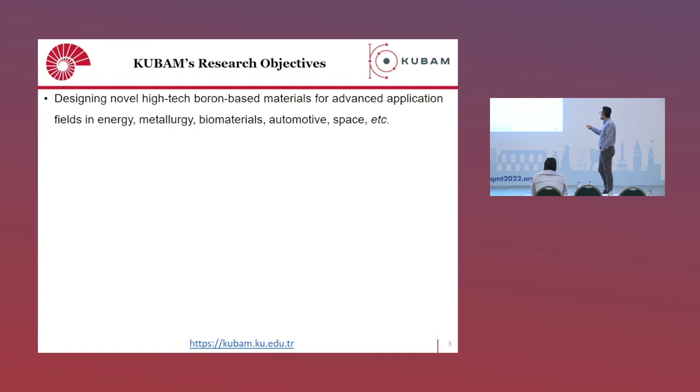Our main research objectives are designing novel high-tech boron-based materials for advanced applications in energy, metallurgy, biomaterials, automotive and space industry, conducting groundbreaking interdisciplinary research in state-of-the-art materials including thermoelectrics, superconductors, batteries, catalysts, hydrogen storage materials, laser crystals, and materials showing unusual properties like thermal contraction with heating.

We would like to patent materials with high potential for industrial applications, and we also initiate pilot scale production of these materials in collaboration with our industry partners. Last but not least, we establish a pioneer outreach program to develop interest in boron and advanced materials research for the whole Turkish community.

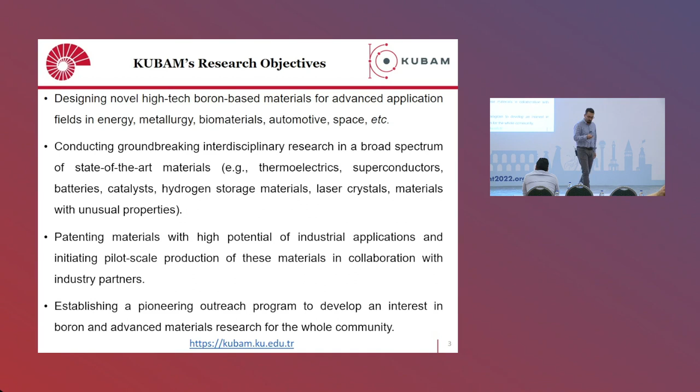Now why boron? Maybe you are interested in why we are doing research on boron-based materials. Let me tell you the motivation.

Boron in industry is mainly used to make glass fiber, ceramics, borosilicate glass, in agriculture for fertilizers, and in drugs and cosmetics.

In more advanced applications, this is magnesium diboride, a superconductor which is superconducting around 40 K, which is relatively high TC. It is used in energy - you can make magnets with this magnesium diboride.

Boron-10, an isotope of boron, is also a nuclear absorber which can be used in nuclear power plants. For military use, boron carbide, for example, is a very mechanically stable and lightweight material. That is why it is used in armor. It can also be used in airbags.

The world boron production capacity for 2018 is around 4.1 million tons, and Turkey itself provides almost 60% of this boron production. Now look at the revenue: in 2018, the total revenue was around $30 billion, which is quite big. But Turkey gets only 1 billion, which means we are producing 60% and getting only 3%.

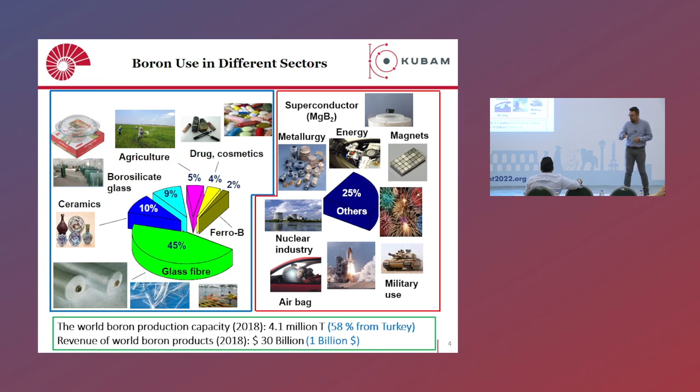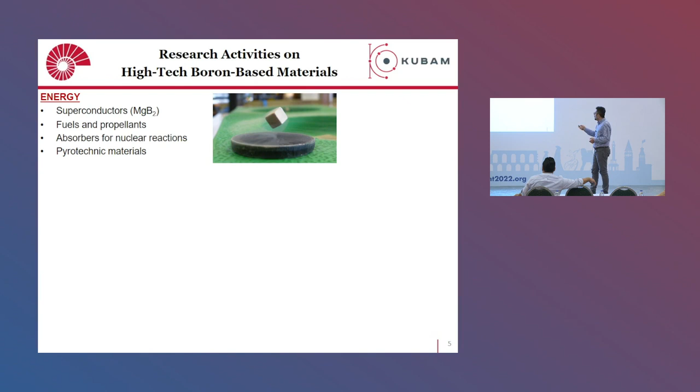Our main motivation is to convert boron from the mineral source to high-value materials. So we are doing energy-related research like superconductors, fuels and propellants, absorbers for nuclear reactions, or pyrotechnic materials. We also do research on next-generation 2D materials.

We try to make borophene, which is the boron version of graphene. So instead of carbon, we have boron, and it shows extremely interesting properties, even superseding graphene. We also make refractory materials and high-tech ceramics, etc.

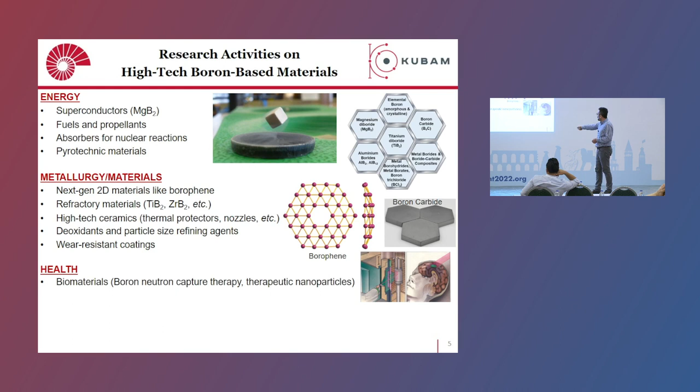We collaborate with other professors trying to produce biomaterials for cancer therapy - this is boron neutron capture therapy - or we try to produce therapeutic nanoparticles. We also prepare composite materials or materials which can be used as missile fuels.

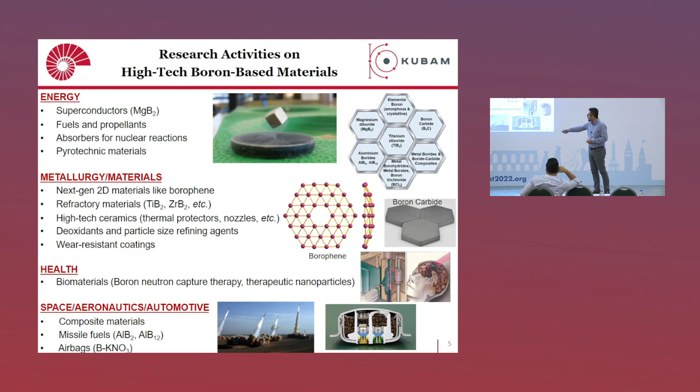Besides boron-based materials, we also work on other advanced materials for thermoelectrics. You can see this is the Curiosity rover, which is powered by radioisotope thermoelectric generators. We also do research on batteries and catalysts, for example.

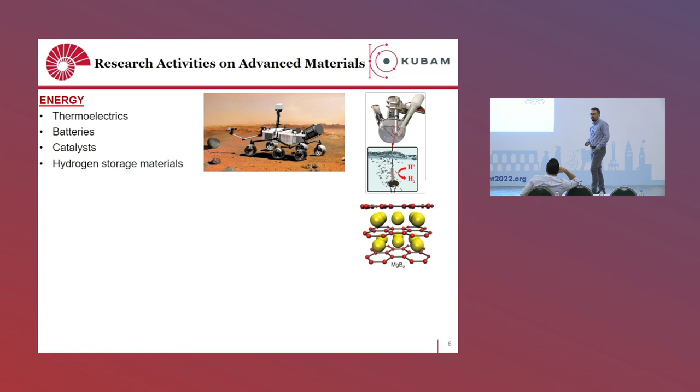This boron-based magnesium diboride is also a very good catalyst. In addition to its superconducting properties, it is also a very good catalyst which produces hydrogen as a clean energy source from water splitting.

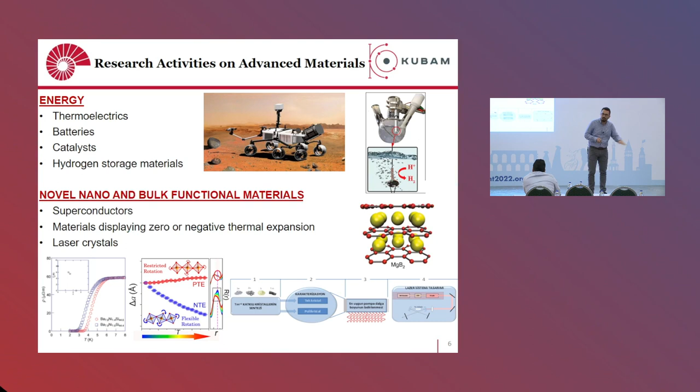We work on superconductors, not only magnesium diboride but even clathrates, for example, which show superconducting behavior. Some laser crystals we develop for niche applications, and we work on materials displaying zero or negative thermal expansion. Most metallic materials expand as you heat them, but these materials, because of their unique crystal structure, have either zero thermal expansion or contraction - negative thermal expansion. We do this in collaboration with other research partners.

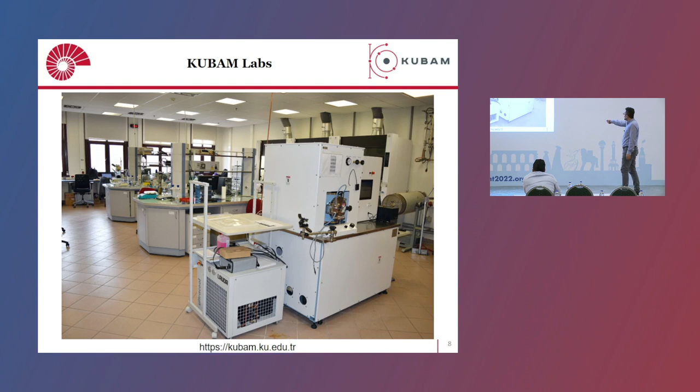To show you our infrastructure: this is one of our labs with a laser flash apparatus, ZEM3, resistivity measurement, thermal conductivity measurements, our XRD, thermal analysis with DSC and TG. We have a glove box for air-sensitive materials, our own SPS to sinter powder materials, and high temperature furnaces that can heat up above 1500 C.

Some other furnaces grow single crystals, for example, by vapor transport method. We do some battery research in this glove box as well. Here you can see a cold isostatic press that we use to sinter materials at low temperature, at room temperature, if we try to avoid high temperature annealing.

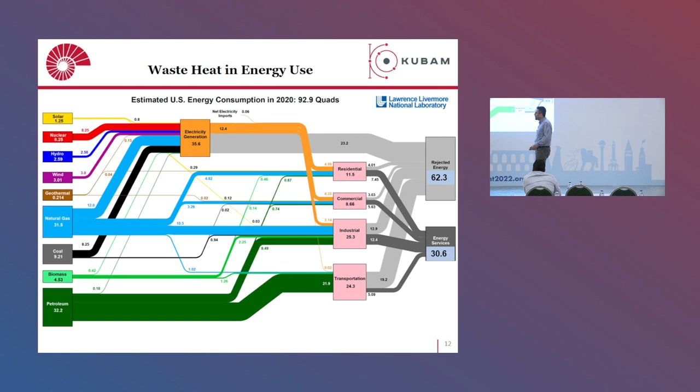Thermoelectrics, today there were a couple of talks given by experts describing the thermoelectric effect, but let me revisit here. Out of 100% energy, still mostly from non-renewable sources like petroleum, coal, natural gas, only 1/3 is provided for useful energy services, while 2/3 is rejected as mainly waste heat. So our main motivation is to convert this waste heat into electricity to contribute to global energy sustainability.

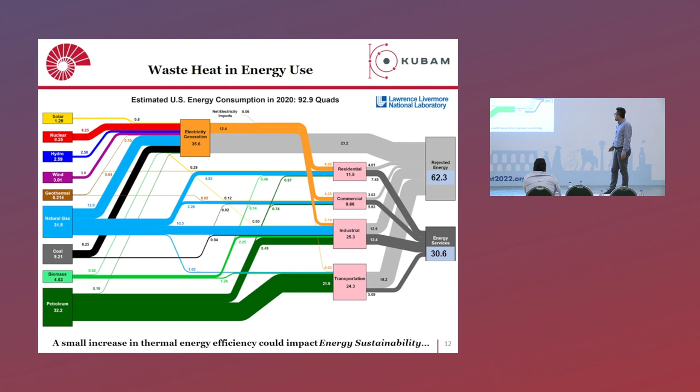These materials are solid-state materials, which means everything is happening through the atomic scale. They don't have any moving parts, don't need maintenance, have long and scalable life, and can be scaled from micro scale applications to large-scale applications.

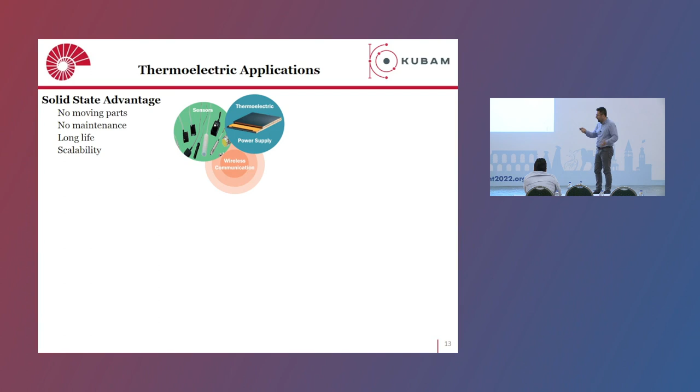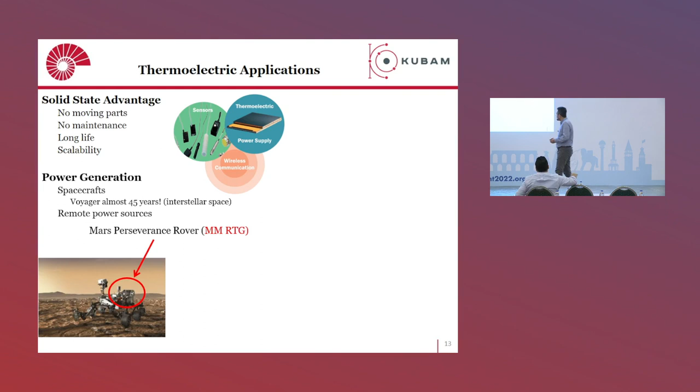For a very long time, they have been used for powering spacecrafts, for example Voyager, which has been investigating interstellar space for almost 45 years, powered by these multi-mission thermoelectric generators. Current ones, like the Mars Curiosity rover and even Perseverance sent a couple of years ago to Mars, are still producing energy through this multi-mission thermoelectric generator. They use the heat produced by radioisotope decay of plutonium oxide and convert this heat into electricity.

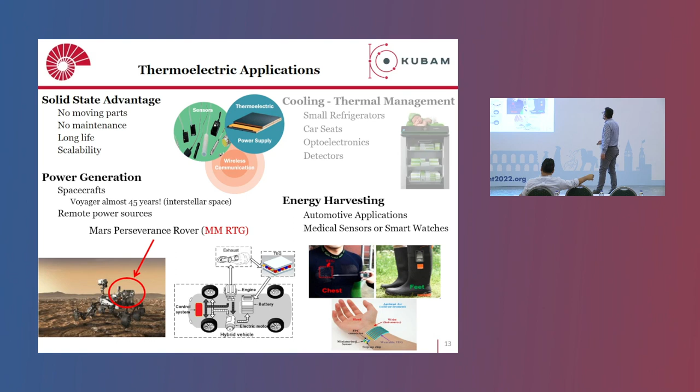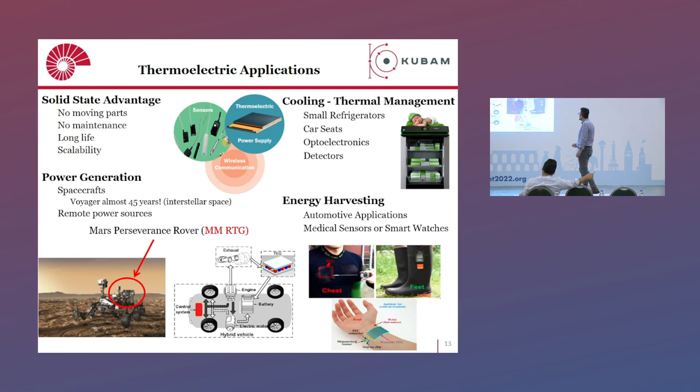You can also convert waste heat in automotives or automobiles to power lighting in the car, or use it for energy harvesting, for example as a medical sensor or smart watches. Besides these power applications, they can be used for cooling and thermal management, creating small refrigerators which need more precise, noise-free cooling. You can use it for cooling car seats. Optoelectronics or detectors need more precise local cooling, so thermoelectrics can provide solutions for that.

So here is the thermoelectric theory. These are based on the Seebeck effect, for power generation, and the Peltier effect, for cooling. Here we have N and P type semiconductors. If we create such a circuit and apply a thermal gradient, this produces voltage because we force charge carriers to move from the hot side to the cold side, similar to gas molecules, and this creates a potential difference.

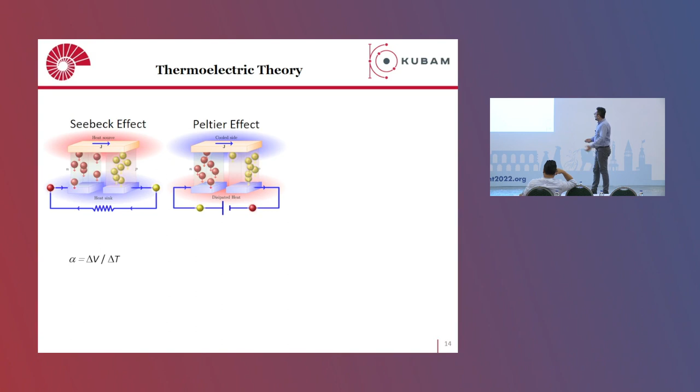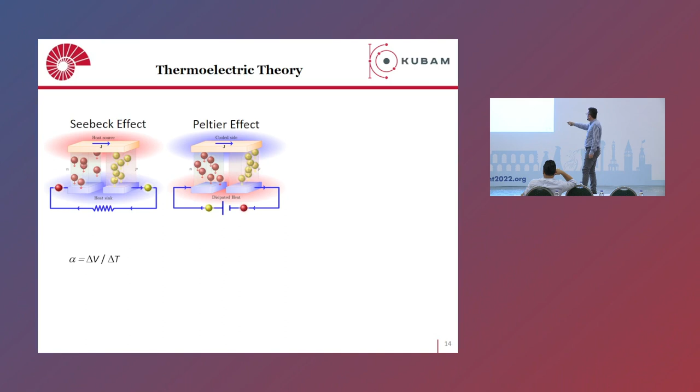This potential difference created per temperature gradient is called the Seebeck coefficient. For the same circuit, instead of applying a temperature gradient, if you apply current, you create a temperature gradient, which means you can use it as a Peltier cooler. So this part will be cooled, this part will be heated, and you can dissipate this heat with some methods.

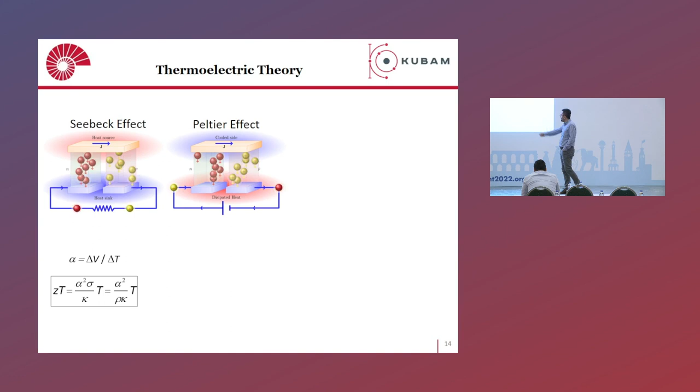In the materials part, we have this ZT, called the dimensionless thermoelectric figure of merit, related to the Seebeck coefficient squared times the electrical conductivity divided by the thermal conductivity times the temperature. So for high thermoelectric efficiency, we try to get good electronic properties, but at the same time lower the thermal conductivity, which is quite demanding and hard.

So if we go to the efficiency, device efficiency is related to the Carnot efficiency times a function of this material's ZT. You can see that rather than having high ZT at one particular temperature, we target high ZT over a large temperature window so that we have high average ZT.

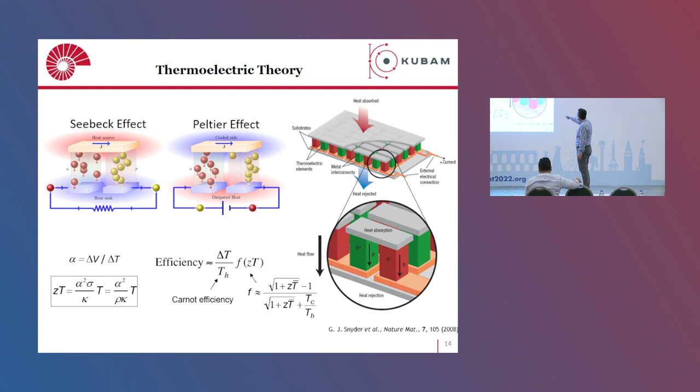Okay, so these are the thermoelectric couples. You can see we have some metal substrate here, some ceramic parts. You create the modules when you put these thermoelectric couples electrically in series and thermally in parallel, tens of them.

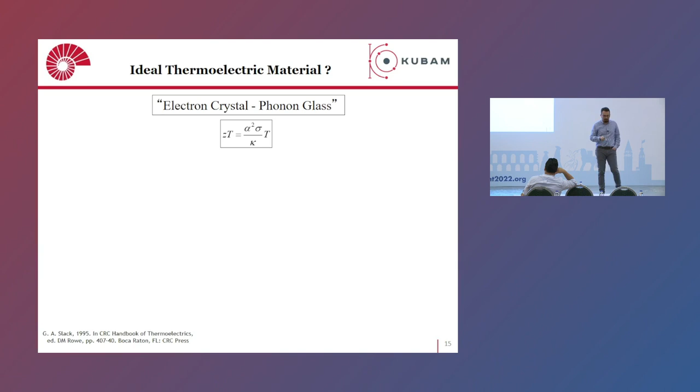So what are the ideal thermoelectric materials? Phonon glass electron crystal describes these materials, meaning they should be very good electronic conductors like perfect crystals, but at the same time have low lattice thermal conductivity like glasses. This is hard to make in one particular material because of these conflicting transport coefficients.

If you have large carrier concentrations, this is provided in metals. Metals have large carrier concentration, but when metals have large carrier concentration, they have low Seebeck coefficient. On the other hand, for semiconductors, you can see that they generally have low carrier concentration and large effective mass.

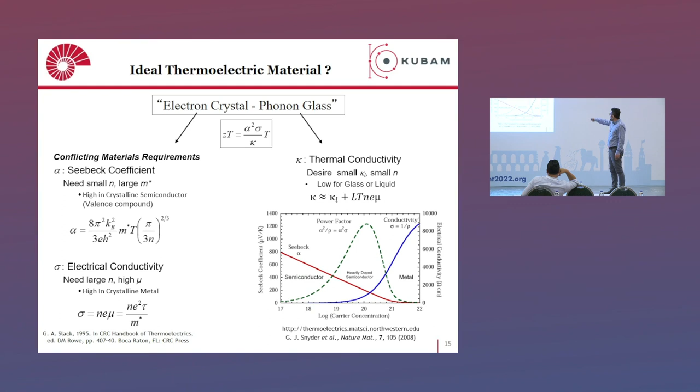For the thermal conductivity part, you can see that this is composed of two contributions: one is the lattice thermal conductivity, another is the electronic thermal conductivity. This is the Wiedemann-Franz law. The electronic portion depends on the electronic structure of the material. The only thing independent of the electronic structure is the lattice thermal conductivity.

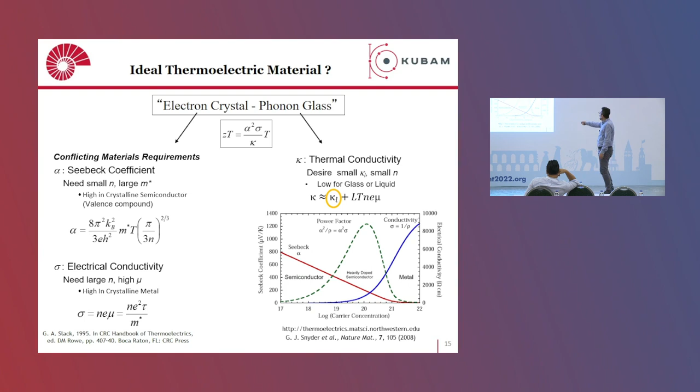So it means we have to find materials that display good electronic properties and low thermal conductivity, and you can tune these properties either by charge carrier optimization or by lowering the lattice thermal conductivity. Let me describe how we can do that.

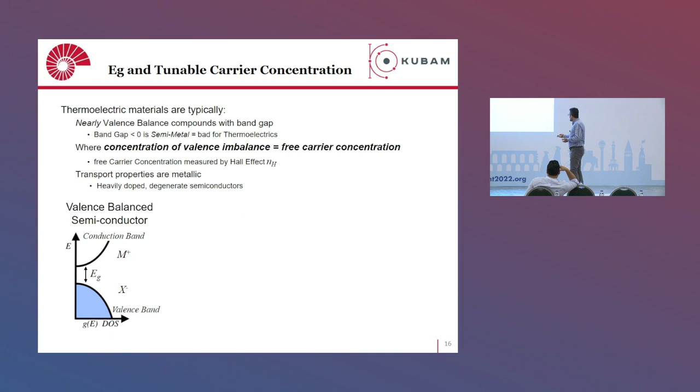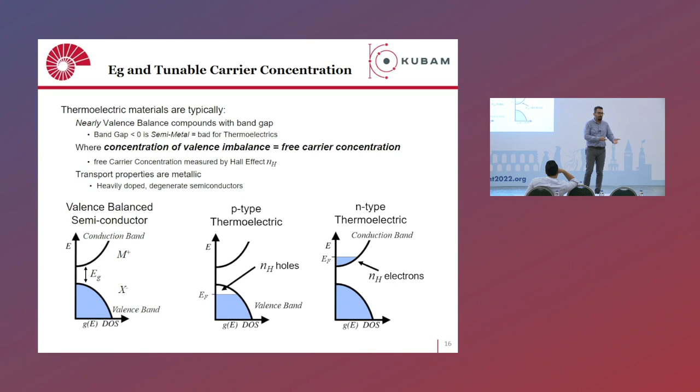The first thing we have to establish for good electronic transport is the band gap. Materials should have a band gap, because if you don't, you have both types of carriers at once. This band gap should be small enough so you can dope the material either p-type, with the Fermi level in the valence band, or n-type, with the Fermi level in the conduction band. But it should also be large enough so that you don't have separate n and p-type carriers, electrons and holes, at the same time, which kills the Seebeck coefficient.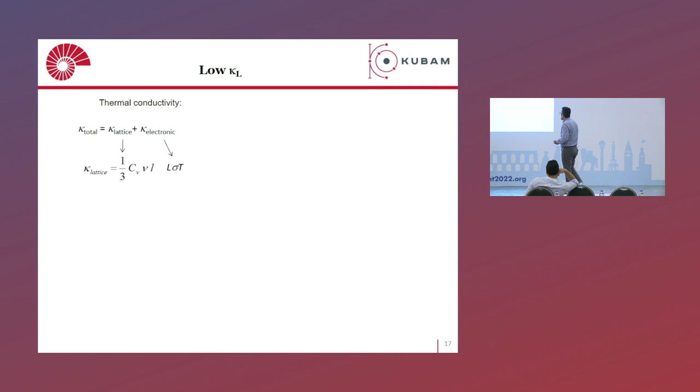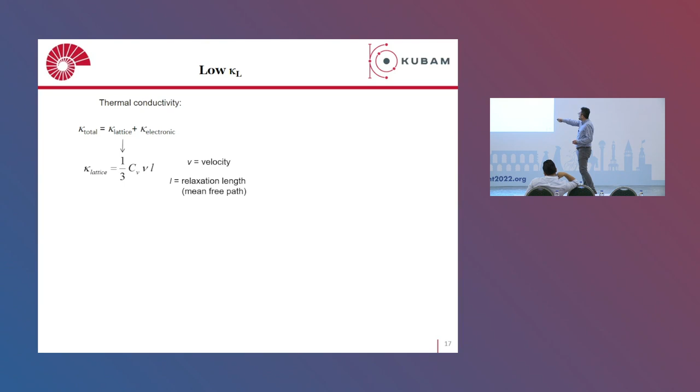Now what about the thermal conductivity? The electronic part is connected to the electronic structure through the Wiedemann-Franz law. The lattice thermal conductivity depends on the specific heat, the phonon velocity, and the phonon mean free path. You can lower this relaxation length, or phonon mean free path, by introducing different scattering sources into the microstructure: nanoparticles, a large density of grain boundaries, and point defects.

You can also introduce nanograins. So say this is your grain structure with large grain sizes. If you grind this material, you create smaller grain sizes, which introduces a higher density of grain boundaries. This increases the grain boundary density, scattering more of the heat-carrying phonons and lowering the thermal conductivity.

You can also create nanocomposites, which means you can intentionally introduce secondary phases either within the grains or at the grain boundaries, and these also act as phonon scattering centers.

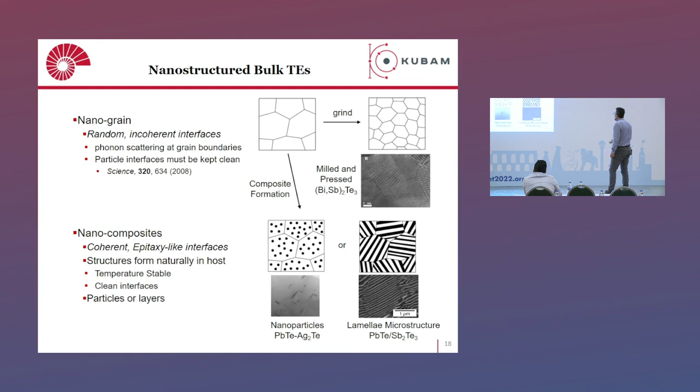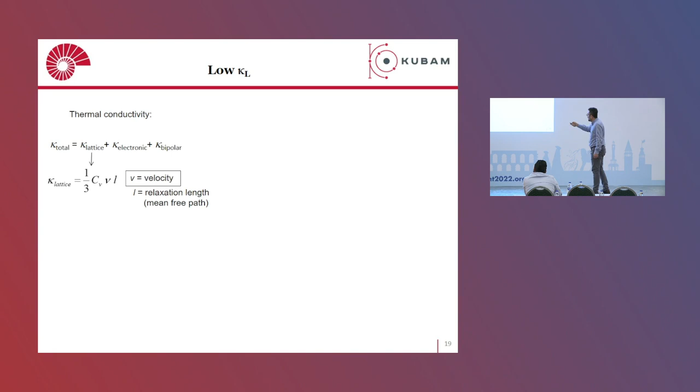For the lattice part, we can also tune the velocity, because lattice thermal conductivity depends on the phonon velocity as well. Here's a simple scheme showing that if you have a small unit cell composed of exactly the same atoms, you have only one phonon mode, the longitudinal phonon mode, and the slope of this dispersion curve gives you the phonon velocity.

Now, if you introduce a secondary atom, increasing the size of the crystal structure, this one mode splits into two. If you introduce more atoms, increasing the lattice, you shrink the Brillouin zone, and you create a lot of optical high-frequency phonons as opposed to low-energy acoustic phonons. These optical phonons are flat, meaning their phonon velocity is almost zero because the slope is zero.

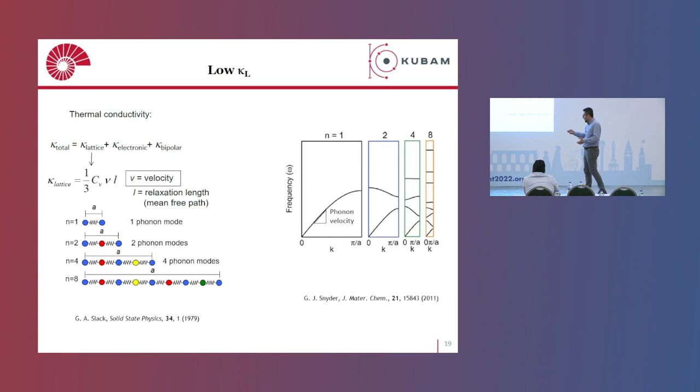If you increase the size and number of atoms, different types of atoms, you basically have larger unit cells, which leads to more low-velocity optical modes that substantially lower your thermal conductivity.

This is nicely shown experimentally for a particular family of materials called the Zintl phase. You can see lithium zinc antimonide, strontium zinc antimonide, all the way to ytterbium manganese antimonide. These materials have similar atoms, but the difference is the complexity.

You can see this is only 6 atoms per unit cell, and as you increase the unit cell size, you introduce different local environments. Here you can reach 208 atoms per unit cell. A large unit cell with a very different local environment leads to lower thermal conductivity, as experimentally shown. This is lithium zinc antimonide, and this is ytterbium manganese antimonide, with extremely low lattice thermal conductivity. You don't need to do anything else - this family of materials has a complex unit cell which inherently shows low thermal conductivity.

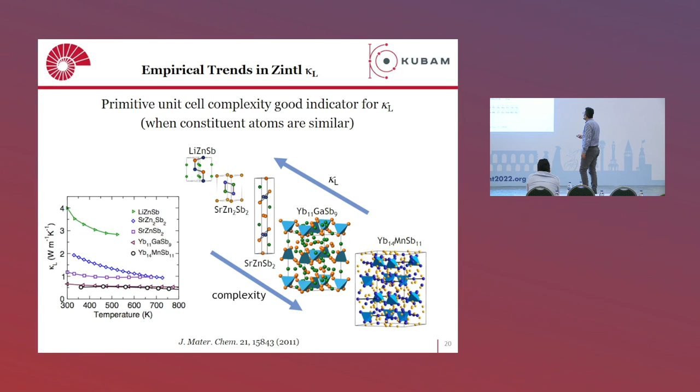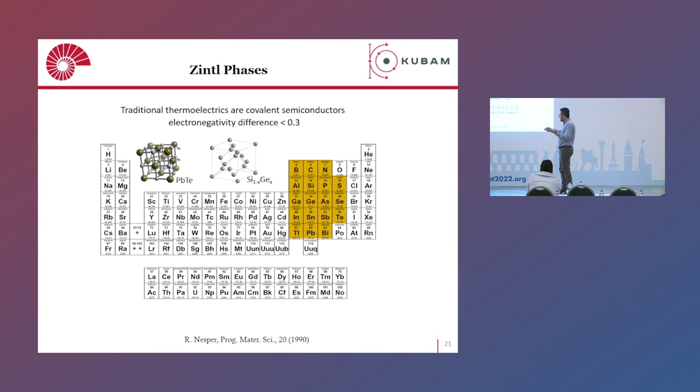Now let me tell you what a Zintl phase is. Maybe this is the first time you're hearing about it. Most traditional thermoelectric materials like lead telluride and silicon germanide, used for space applications, are covalently bonded materials composed of p-block elements.

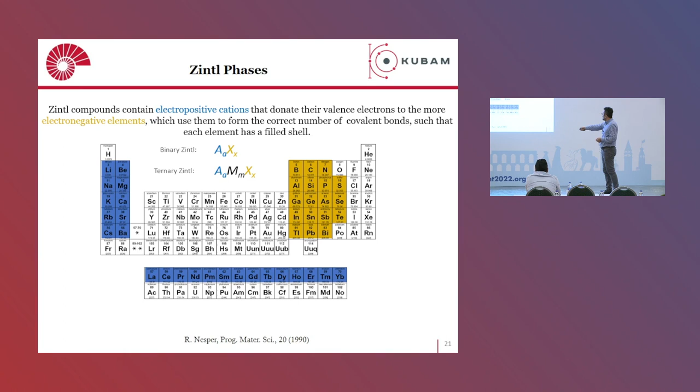Zintl compounds contain both electropositive cations, which donate their valence electrons to the more electronegative p-block elements. These anions use the electrons to form the correct number of covalent bonds so each element has a filled shell - essentially an electronic transfer from cation to anion, which leads to a particular connectivity of the atoms. The cation can be alkali metals, alkaline earth metals, rare earths, even transition metals, and generally the anionic part is the p-block element.

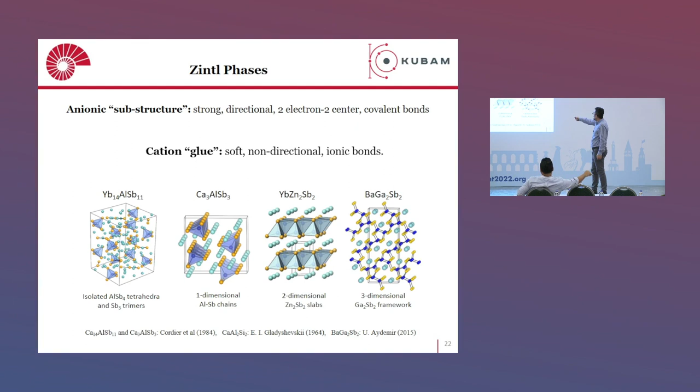These Zintl phases are unique because they have an anionic substructure. You can see different anionic substructures - 0-dimensional, 1-dimensional, 2-dimensional layered, or even 3-dimensional structures. They have strong directional two-electron, two-center covalent bonds, which accommodate the cations in the cavities, shown here as blue atoms. These cations have soft, non-directional ionic bonds with the covalent framework, so they're like composite materials at the atomic scale.

Most of these materials inherently show p-type properties - the 122, 526, 313, 14111, 122 phases all inherently show p-type behavior because of cation vacancies. Generally when you make them, you observe a very stable cationic defect in the structure - calcium, magnesium, or whatever - and they show inherently p-type behavior.

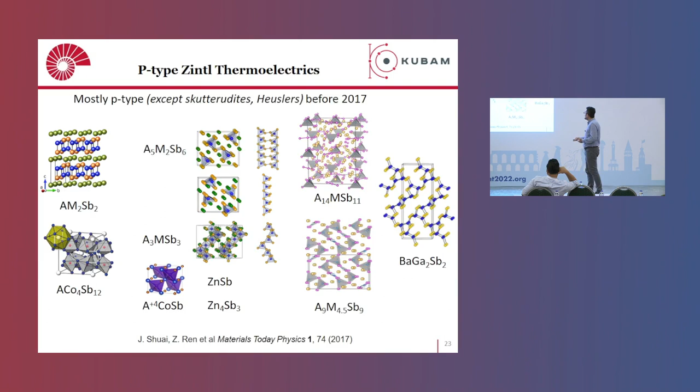But only recently, a paper came out from the Panasonic group showing that magnesium-3-antimony-2, a typical Zintl phase with magnesium deficiency that has so far shown p-type behavior, can actually be made n-type - and the n-type analog can show even better thermoelectric efficiency. They showed that while state-of-the-art materials generally reach a ZT of 1, this easily reaches 1.5 at relatively high temperatures.

To make this n-type, there's a unique strategy: you have to add excess magnesium when making the material, to suppress the formation of magnesium defects which lead to the p-type character. So we knew you could make this material n-type, but then we thought - how can we improve the thermoelectric efficiency further, or what else can we do?

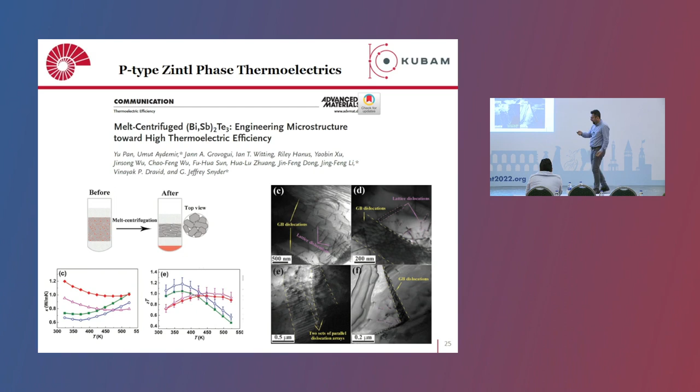This lowered the thermal conductivity substantially. Compared to the non-centrifuged material, you can see the thermal conductivity is lowered by 50%, and the ZT is also improved a lot.

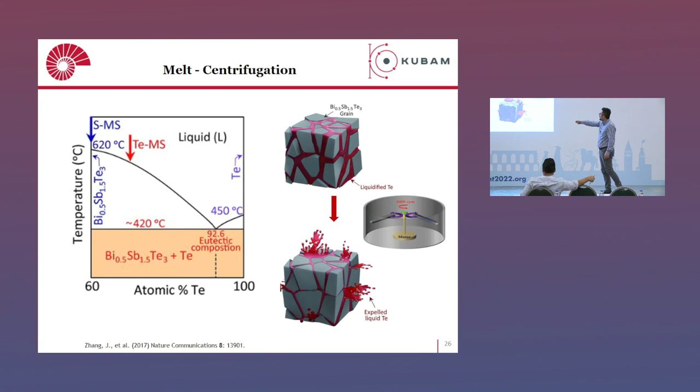Okay, the idea was this: you have bismuth antimony telluride. If you add tellurium, you have this eutectic point. If you just heat this material around 500 degrees, you can remove this melt and create such microstructural features. So we thought, why not apply this to magnesium antimonide?

Why? Because the nature is similar. Here you can see magnesium 3 antimony 2, and here we have magnesium. Between magnesium and magnesium 3 antimony 2, we see also a eutectic temperature. So we went a little higher than 650, maybe 750, by adding excess magnesium and applied this technique.

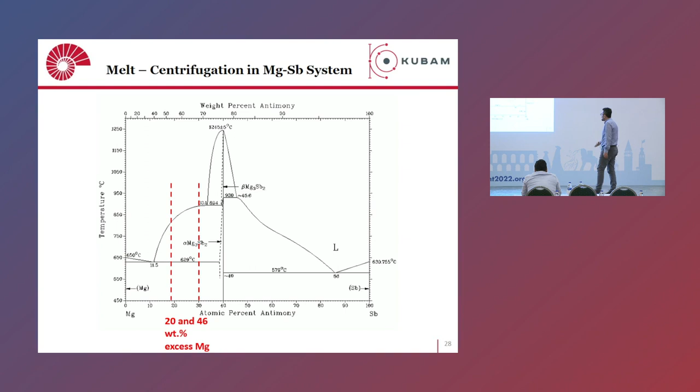So we added 20 and 46 weight percent excess magnesium, and then did some research to see the effect of it. This is done with in situ and external addition.

Let me explain it to you here. You can put all these materials in a steel vial and do high energy ball milling, let's say 2 hours. If you add the magnesium at the very beginning, this is in situ. If you add magnesium after you do this 2 hours of ball milling, adding the external magnesium afterwards, this is called ex situ.

This preparation will lead to powder material. You do sintering with spark plasma sintering at a certain condition to make this bulk material. Then we seal this bulk material in a quartz ampule under protective atmosphere, because if you put it in an oven directly, it will be oxidized. To avoid that, we put it in a quartz tube and then put this in an oven.

We did a quick centrifugation. You can see that the magnesium at the molten state just comes out from the bulk piece, and you can clean this and investigate the microstructure. Of course, the first thing we do is XRD for phase analysis, TEM and SEM for microstructure analysis, LFA for thermal conductivity, and ZEM3 for electronic transport characterization.

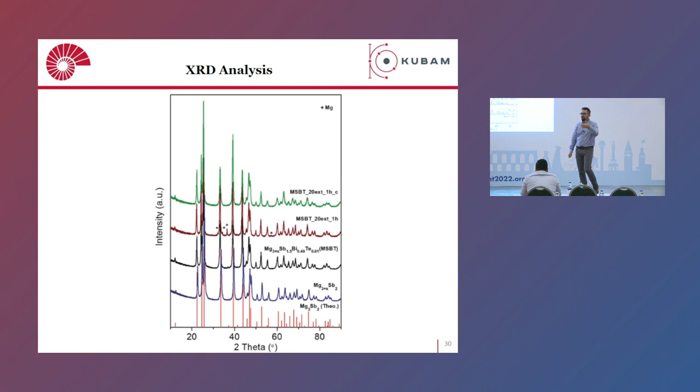So this is the XRD diagram. This is the theoretical pattern. You can see that this is magnesium 3 antimony 2 as it is. Then we add a little bismuth and tellurium to tune the electronic properties, and then add extra magnesium.

By adding extra magnesium, you can see that sometimes even with this melt centrifugation, there is some residual magnesium left in the microstructure. You cannot 100% remove it with this method, but we could also remove it 100% in some cases. So it depends on the experimental conditions.

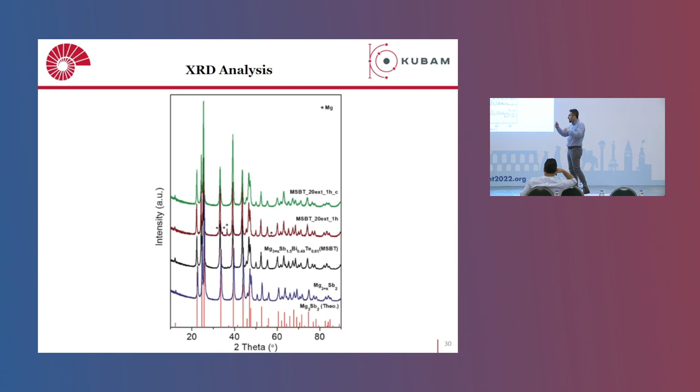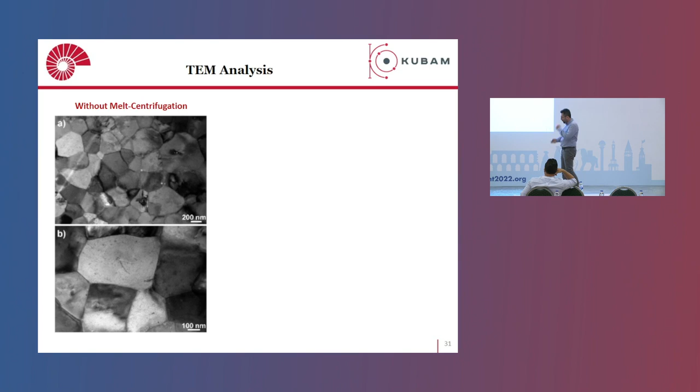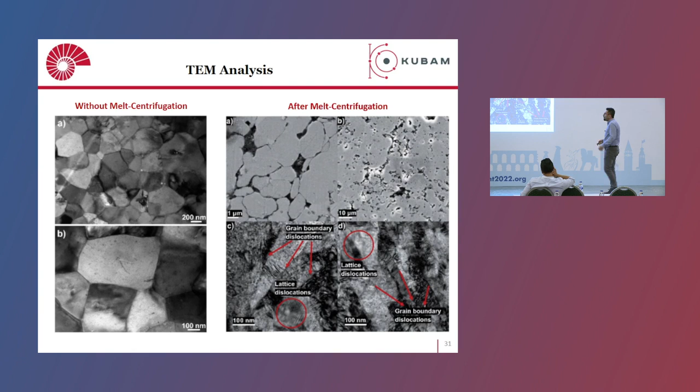What happens if we apply this melt centrifugation? We create large pores, as you can see here, but at the same time small pores, which means microscale or nanoscale pores. At the same time, you can see that we create these ordered grain boundaries—nicely ordered, completely different from these other grain boundaries. Plus, we show that we have also some lattice dislocations within these grains. We hope that this substantially reduces the thermal conductivity.

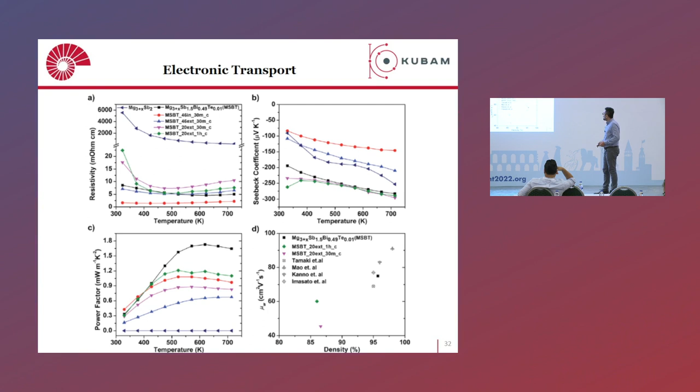It is quite good, which means electronic transport is not severely affected by these methods, although the power factor is slightly low. So power factor is slightly low, but you can see that the thermal conductivity is substantially low.

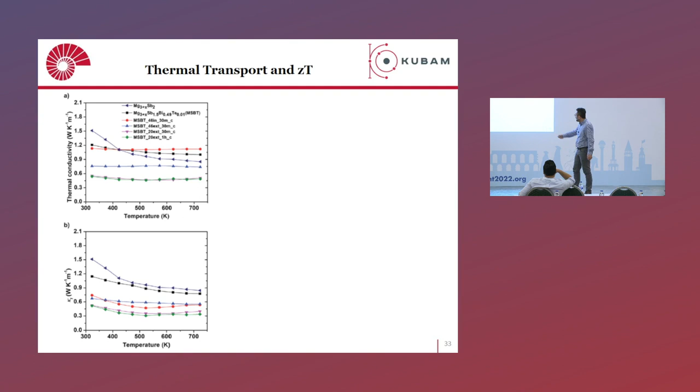This is undoped, this is doped material around 1.2. When we do melt centrifugation, the total thermal conductivity is reduced by 50%, and lattice thermal conductivity as well. This overall leads to around 43% enhancement if you compare it with the MSBT phase.

So these are not experimental, but theoretically calculated efficiencies. Okay, so far it was for magnesium antimonide.

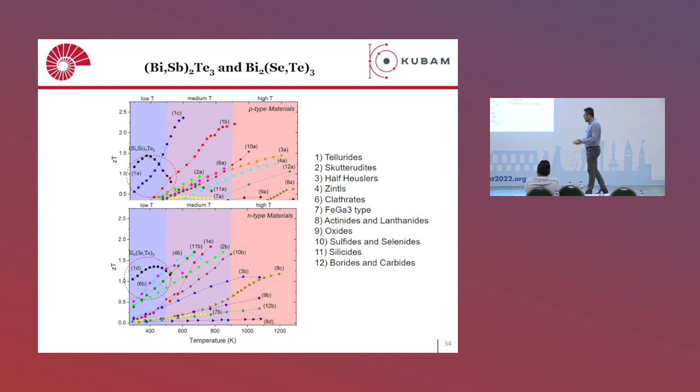We did some research also for the bismuth antimony telluride and bismuth selenide telluride. These are the low temperature materials that are mainly used for Peltier coolers. You can see this is the P-type, this is for the N-type materials. For the low temperature, they are kind of like the best materials. Bismuth antimony telluride, BST phase, is very good for the P-type, and bismuth selenide telluride is very good for the N-type. So the others cannot compete except for the magnesium antimonide so far.

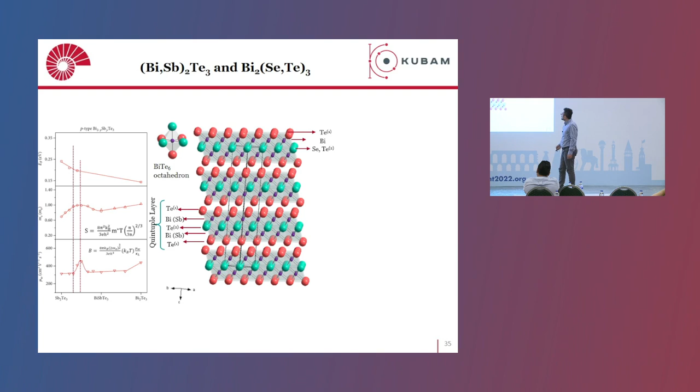You can see that if you just do a solid solution of bismuth telluride with the antimony telluride, you can also engineer the mobility, effective mass, and the band gap. We just focused on these two materials: one is with bismuth 0.3 and the other one is bismuth 0.5. For the selenium case, you can do the same. You can basically do a solid solution of bismuth telluride with the bismuth selenide. They have the same crystal structure, which means you can combine them in any ratio you want, and you can also optimize their transport properties.

So now we saw that in literature, copper is a very good dopant to basically optimize the thermoelectric properties of bismuth telluride. And while we saw this paper, we were basically making another research on copper telluride.

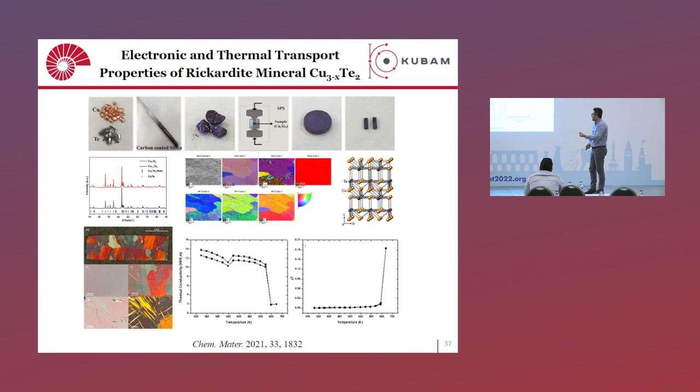Now, as a copper source, or for its metallic nature, we just put this material in bismuth antimony telluride. So here we prepared the bismuth antimony telluride via solid state synthesis, ground it, put it in a vial, a steel vial, added copper telluride, did XRD analysis, SPS, LFA, and all the other analysis, transport characteristics.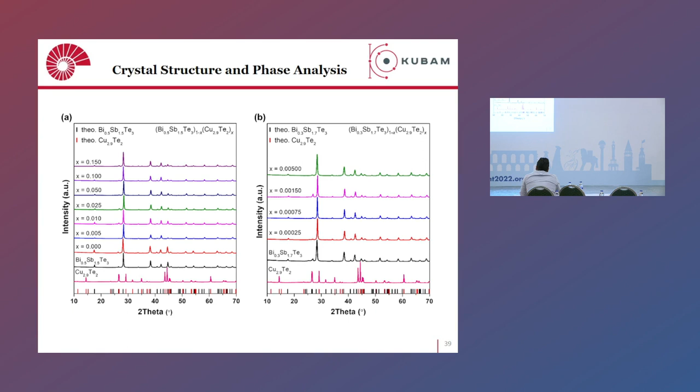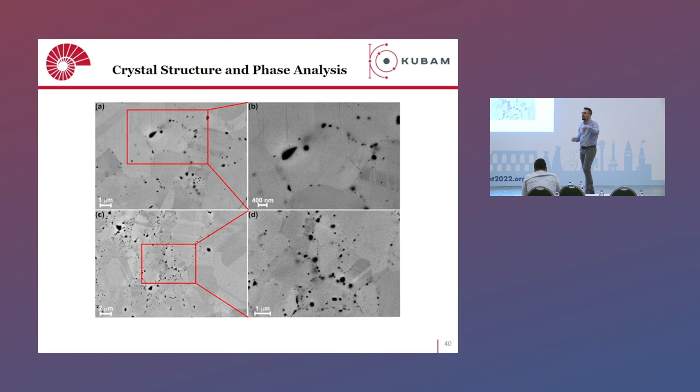Okay, here are the microstructures. You can see nicely these grain boundaries, very well-resolved grain boundaries. At the grain boundaries, we see mostly copper telluride. The copper telluride that we introduced is mostly decorating the grain boundaries. This is good because it is a metallic material, which might help with the electronic conductivity, but at the same time, it is a secondary phase, which can lower the thermal conductivity.

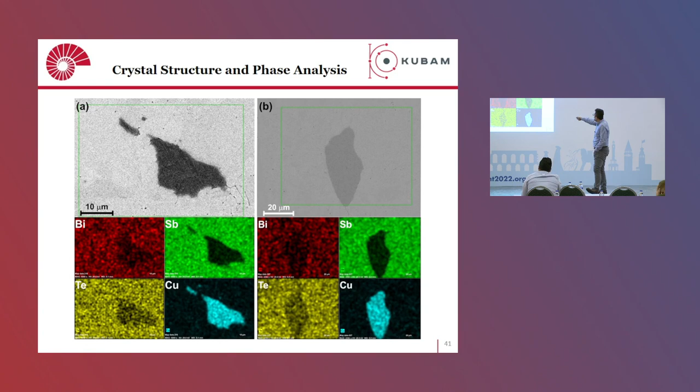So here you can see this is the mapping, elemental mapping. This part, so this is this region. You can see that this part is bismuth antimony telluride, and here this black area means this is antimony deficient but copper excess, which means this is copper telluride, and this is bismuth antimony telluride. This is the same: you can see that this is copper telluride, and the rest is bismuth antimony telluride.

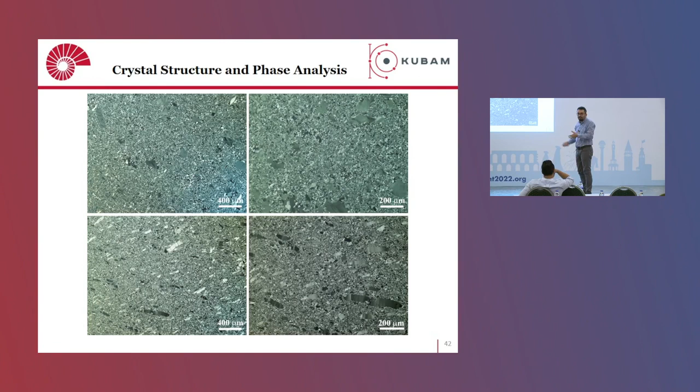So these are the optical images. This is the cross-plane direction, these two, and this is the in-plane direction. There is a striking difference between them. You can see that in the in-plane direction, we see very nice layers of bismuth antimony telluride, which means the main orientation is towards the in-plane direction. This is perpendicular to the SPS direction, and this is also nice because it can improve the electronic transport through the in-plane direction.

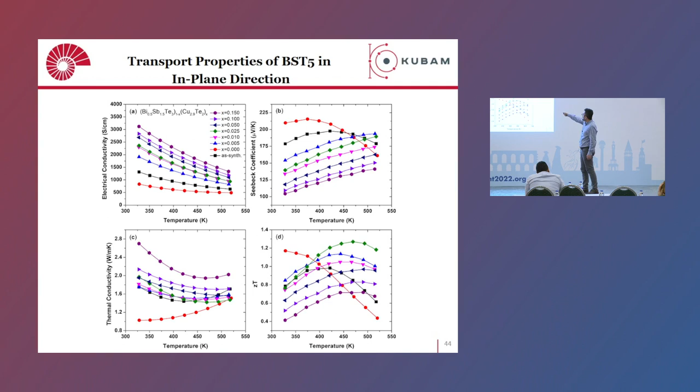So this was the cross-plane direction. We see a similar effect in the in-plane direction. The trends are the same: almost higher electrical conductivity, lower Seebeck, a little bit higher thermal conductivity, but still, especially around 1.2 when 10-minute ball milling is applied, at higher temperatures copper telluride addition of, let's say, 0.025 gives much higher ZT values. This means that by introducing these nanoscale secondary phases, you can optimize the thermoelectric efficiency or performance of these materials.

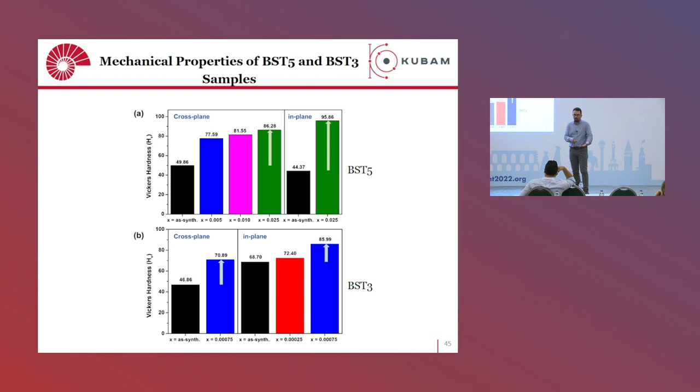So in addition to the transport characteristics, it is better to also check the micro hardness, or the mechanical properties of these materials, because for module applications we want durable materials. Here you can see the synthesized materials. They are black. This is bismuth 0.5, this is bismuth 0.3. When we add copper telluride in the cross-plane or in-plane direction, for both cases we see a substantial increase in the micro hardness, the mechanical properties of this material.

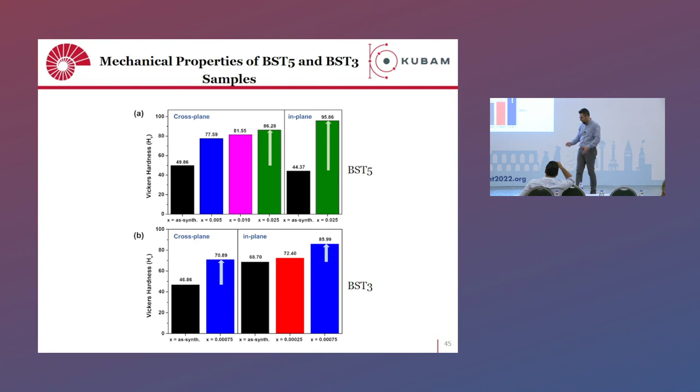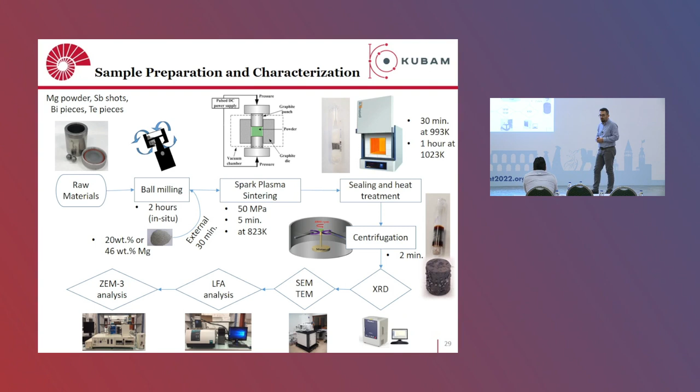Thank you. Yep. So maybe the last question: is copper 3 telluride the same crystal structure as antimony telluride? No, they are completely different. Copper 3 telluride has, I think, an orthorhombic structure at low temperature, and it goes to a tetragonal structure, and then to a hexagonal structure. Copper 3 tellurium 2 has a different structure from antimony telluride.

Okay, then your motivation for this study was just to put some different nanophases in the structure, or do you have some other idea?

Yeah, exactly. So okay, let me just show you here. Maybe I just didn't mention it well. Did you try for the N-type too? Yeah, so the idea was this.

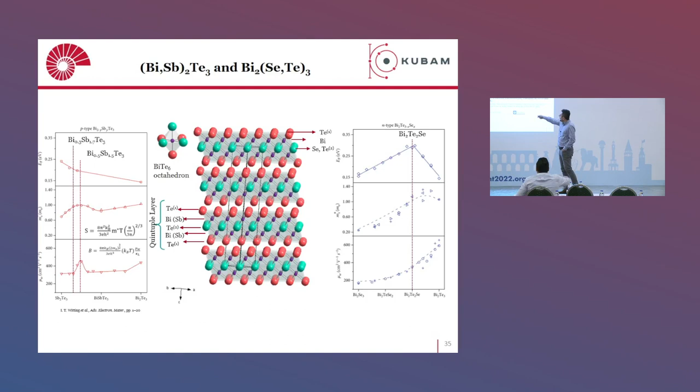When we were dealing with this research, we found a couple of publications dealing with bismuth telluride doped with copper, getting better efficiencies. We don't want to repeat that, but we have copper telluride, which can act like a copper source, and at the same time shows a strange phase transition and is metallic. We thought, rather than using pure copper, why don't we use copper telluride?

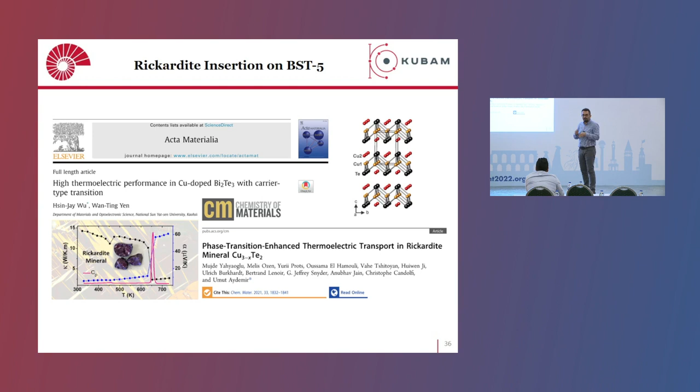Because copper is a mobile ion in copper telluride as well, with high ionic mobility. It can diffuse easily into bismuth antimony telluride, perfectly fine. And we also have tellurium, which is good because the main material also has tellurium, so if there is any loss of tellurium, this can compensate for that loss. So these were two different aspects we introduced into the structure, and we saw that this works quite nicely.

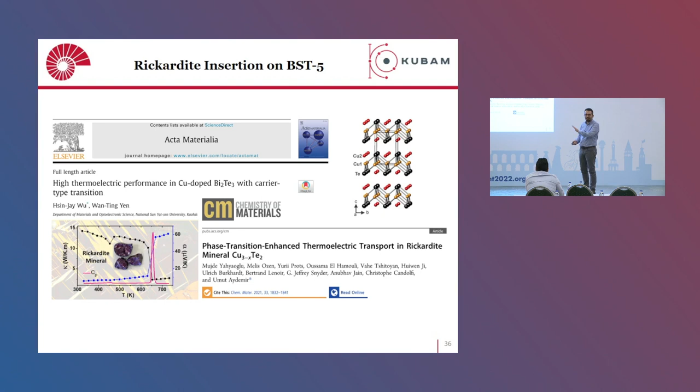So we haven't published this paper yet. We are just writing it. It's a very good idea.

About the N-type bismuth telluride, did you try something? Yeah, I didn't show it here. Yes, we tried some bismuth selenide telluride, and rather than copper telluride, we doped it with boron—carbon-coated boron—and we could increase the ZT quite a bit. We did it as well, around a 20-30% increase.

Because the biggest problem for bismuth antimony telluride is the N-type, exactly. We did it as well, but here I just showed these two results because this paper is also not written yet. And also it's interesting that the mechanical properties improve with this.

Right, exactly. This is the usual thing. Generally, bismuth antimony telluride, as you know, is a very anisotropic material. There are some cleavage planes, and it easily breaks down. When you add this metallic, ductile material, it improves the mechanical properties.

Any other questions? Yep, here. Sorry, ask one more.

Maybe if you just say—no.

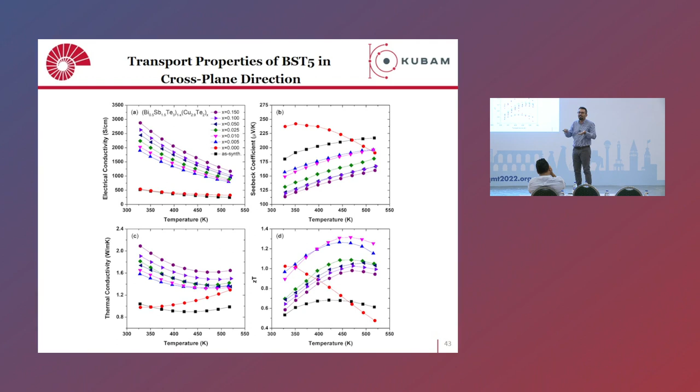So what is going on here is purely a minority carrier effect. We are activating the electrons as opposed to holes because of the shrinkage of the band gap, purely due to ball milling. Because in the ball milling, we are forcing the steel balls to hit each other with the powder material, creating local heating and local pressure, which is probably introducing a lot of additional defects to the crystal structure and manipulating the band structure.

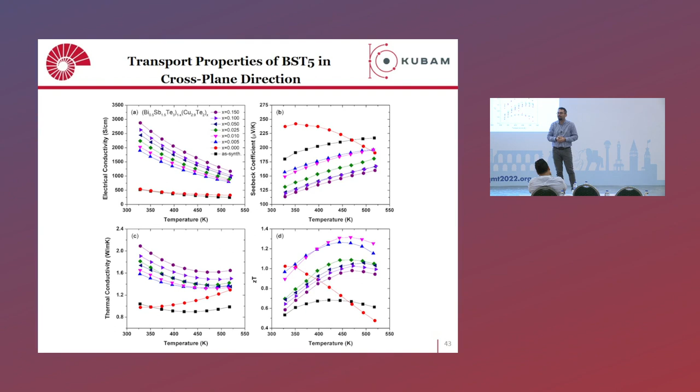Thank you. Okay, thank you very much.